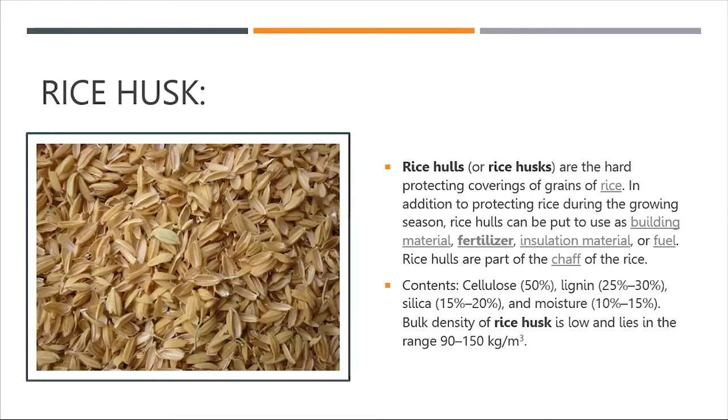Not so easy. Actually, silica from rice husk here in Malaysia is used in a low temperature combustion process to create an amorphous silica that can be used to make aerogels. Because if the silica is burned at high temperatures and becomes crystalline, you can't dissolve it. But we have developed, together with the local university, a low temperature burning process where they collect all that material and make it into an aerogel, and the product is already being sold in the market. This is what you can do with the silica. Of course, low temperature burning also means less efficient energy recovery, but you have a valuable byproduct.

Actually, I was very much against using rice husk for electric power production, because it's too complicated a feedstock, and the OPEX, the operation expenses, are much too high, because you have to regularly hack off the deposits from the pipes in the boiler. It's terrible - it's terrible stuff for a boiler.

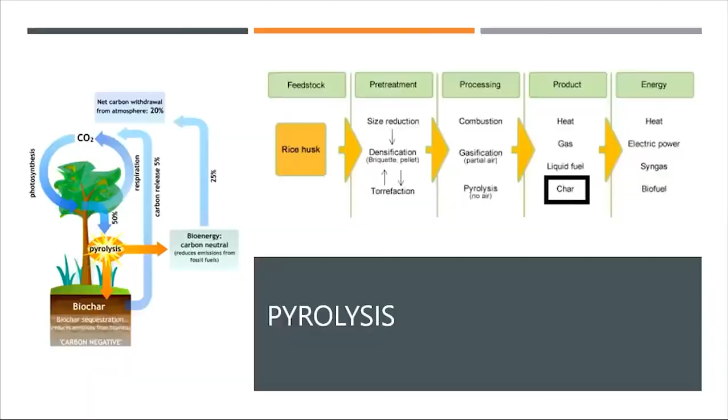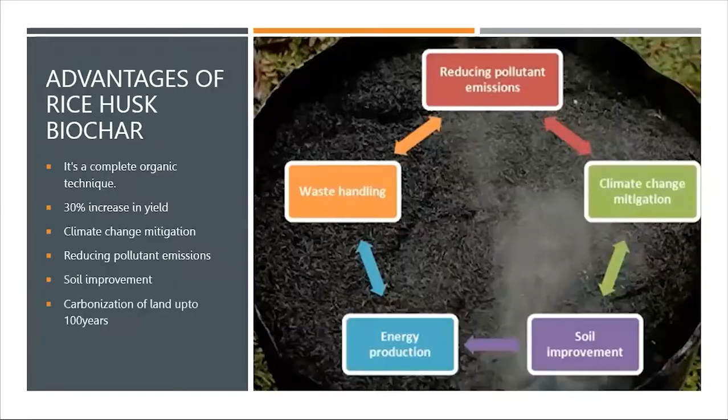Yeah, we may need to look into how we do it at lower temperatures, because when it's not crystalline, you don't have to hack it off. That's true - other type of burning mechanism. Interesting, I have put my LinkedIn address up, so if you would like to connect, I'm interested in hearing more about that, because we are working a lot with rice in India.

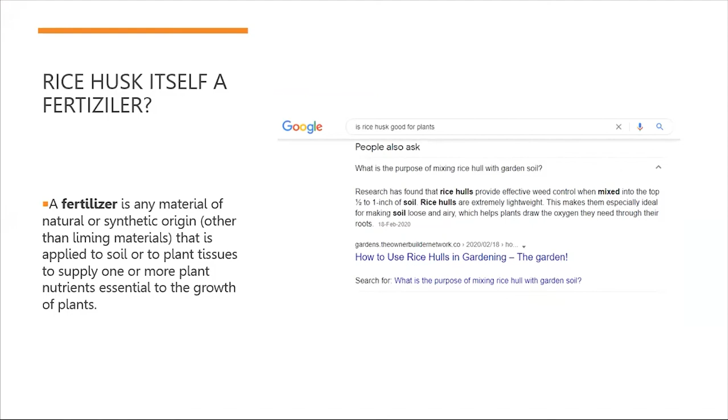Let me share some realities of rice husk in Pakistan. Basically, rice husk is not a product of the farmer; it's a product of the rice mills. They process the rice and use the husk for their own boiler for energy generation.

The people who buy the rice husk for their low pressure boilers face slagging behavior on the walls of the boiler because of the silica content. We observed after passing through the boiler it's 52% in the bottom ash, with very little fly ash, and even fewer nutrients in the final ash product.

If we compare with wheat straw and corn stalk burning, the potash level is around 15% in the fly ash, but it's less than 3% while using rice husk. On the other hand, bottom ash production goes 30% higher than normal biofuels.

The other thing is the rice husk is available in loose form in Pakistan. It cannot be baled because of the very fine particles, and in raw form its silica content is close to natural sand—the bounded silica is around 10 to 12% inherently. We normally recommend the inherent or bounded silica should be below 5% for smooth boiler operations. So that's another side of this rice husk, particularly in Pakistan.

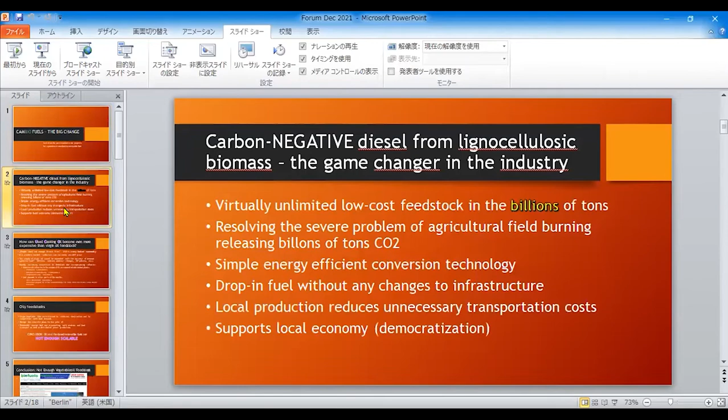Will you please click on the third slide? Just click it on the third slide. On which one? The third slide, or use your up and down arrow keys. Yes, yeah, now it's working. It's working now. Okay, then we run it from here. I don't want to go through the whole thing again. If the full screen doesn't work, then let's go through the small screen. But here you can see, I hope. Yeah, we can see now.

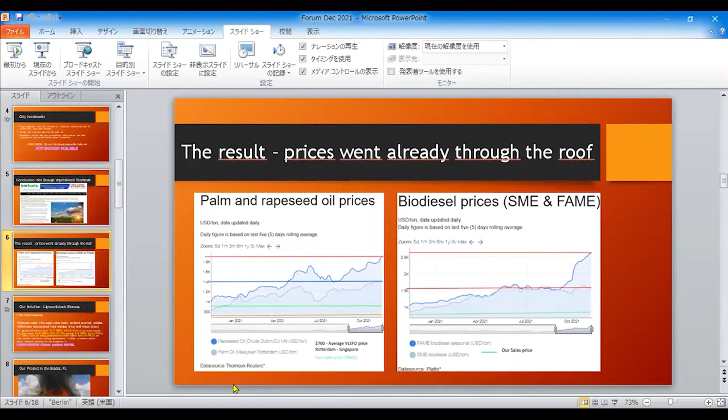You see what's happened with the vegetable oil prices, they are really going up through the roof, and that's through this competition from repurposed refineries, fossil fuel refineries. It will further increase and push prices even higher. It's unbelievable what's happening there.

Okay, so our solution is pretty simple. We take lignocellulosic biomass, which is completely without limits. We use biomass waste like sugarcane trash, orchard pruning residue, for example in California from almond shells and walnut shells and things like that, and also the pruning residue, which is very, very good feedstock. When they have harvested, they cut the trees, the branches of the trees.

So our main target is the otherwise incinerated field residue, rice and wheat straw. And that's quite amazing what's happening with the incineration: 16.6 billion tons of CO2, 9.8 billion tons of CO2 equivalents, 1.1 billion tons of smog precursors, and 66 million tons of PM2.5 go into the air through this. It's estimated that about 1 million people in the world die prematurely due to this kind of emissions.

For us, it means an unlimited potential for the production of carbon negative biofuel. Why carbon negative? We have a side product that is biochar, and much of the biomass, or the CO2, is sequestered in the biochar. So in the end, our fuel emits less CO2 into the air than if you were burning it in the fields.

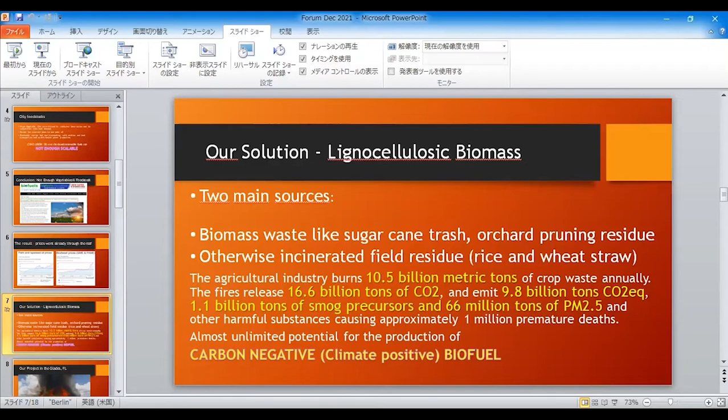So this is what we are doing. This is a project in the US, in the Glades in Florida. Before harvest, they incinerate the sugarcane trash. There are, in the meantime, other harvesting methods there. And it's good for 800,000 tons of fuel oil that we could produce there.

This is our project in India. Farm to Energy is a company harvesting the rice paddy, rolling it up and baling it. They deliver it at the moment to thermal power plants for incineration. But the yearly potential is just scratched on the surface - it's 20 to 25 million tons, which is good for 5 to 6.5 million tons of fuel oil.

To give you a comparison, Maersk, the largest shipping company in the world, uses about 10 million tons with their 750 ships. So we can make quite a big dent already with the feedstock available in Punjab. In total we have 17 projects in the pipeline in the US, in the Philippines, in Vietnam, in India, Sri Lanka, Mauritius, and Morocco.

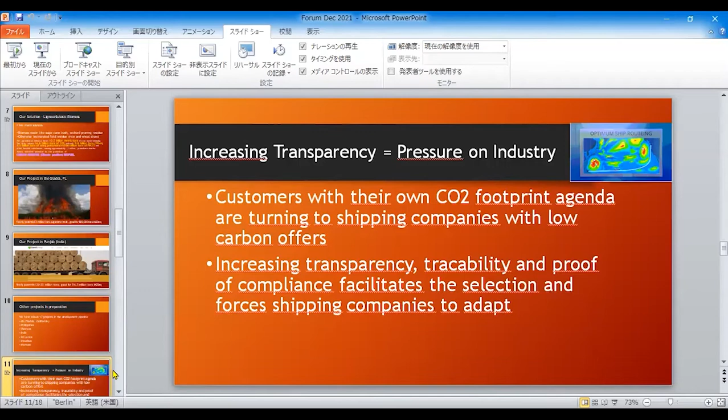Okay, next. How do we do it? We are using a zeolite, a catalyst. It's also called a molecular sieve. It has, in principle, small openings that crack the material. I cannot go into much detail, but that's what we are doing, and it's working, which is nice.

So what we are doing is taking the long hydrocarbon chains of the lignocellulosic material and cracking them into shorter chains, and they fall into the range of diesel.

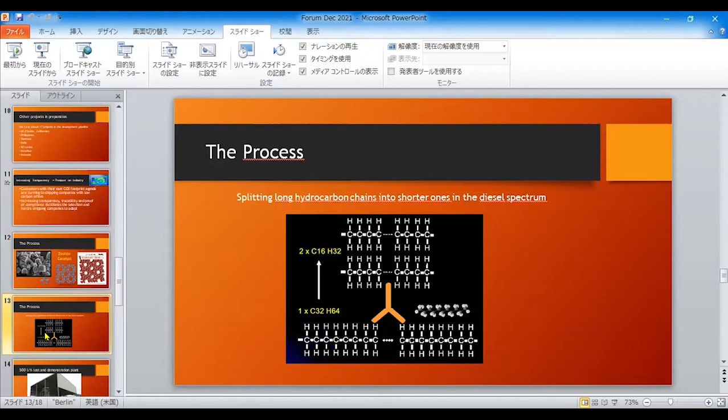This is a 500-liter test and demonstration plant per hour, so that is about 4,000 tons per annum production. This would be a standard for a village or a small town to produce their own fuel for their trucks and agricultural machinery. They don't need Shell and Exxon anymore.

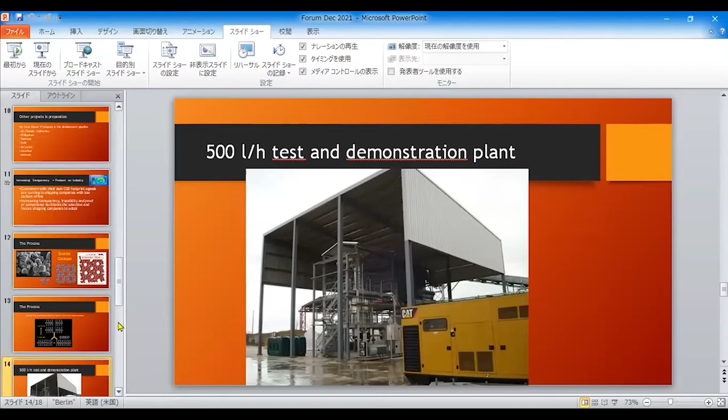Okay, I don't want to go into many details. The interesting part is when it's used in the ship, there is Daphne Technology, a new company in Switzerland. They have a new exhaust gas cleaning system which will make our fuel better than zero. We can go carbon negative. And we don't have harmful substances because this filter is filtering out 95% of sulfur oxide and nitrogen oxide, and they make fertilizer out of it. Very fascinating technology, I really love it.

So this is something you should keep in mind, because this can also be used for diesel power plants, even for conventional diesel power plants, not only with our fuel, but conventional diesel power plants can use this as well.

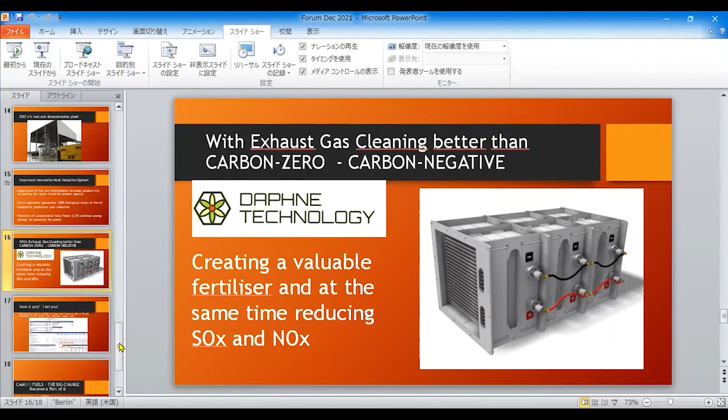It's a good company. This will convert these things to electricity? This machine will convert to, produce electricity? Yeah, you know, you have diesel ship power plants, as you mentioned. You have diesel power plants all over the world, yeah? And this filter is actually filtering out all the harmful substances from the exhaust of diesel power plants.

Okay, so the Philippines have, for example, 1.6 gigawatt of diesel power plants, a huge number of diesel power plants. So the question is, what is the feedstock price in your country right now per ton, on average, of all feedstock you are using?

Yeah, we just have to collect it because it's a problem for the farmers. The Indian government even had high fines for incinerating it, but they don't have the money to collect it, so we do them a big favor in just collecting it. And of course, in the long run, we will have to pay for it, but it will probably be in the range of initially $10 to $15 per ton or so, but it's more than nothing. And at the moment, for them, it's a headache.

Do you work with wet sludge as a feedstock? Wet sludge, no. We need to dry the feedstock, and also we have to get it down to about 5 millimeter size. We are using a special machine from the US that is producing down to 200 micron powder from it, and it's very energy efficient. It's not a shredder, it's a kinetic disintegrator, which is drying and disintegrating in one stage, and it's a very smart system.

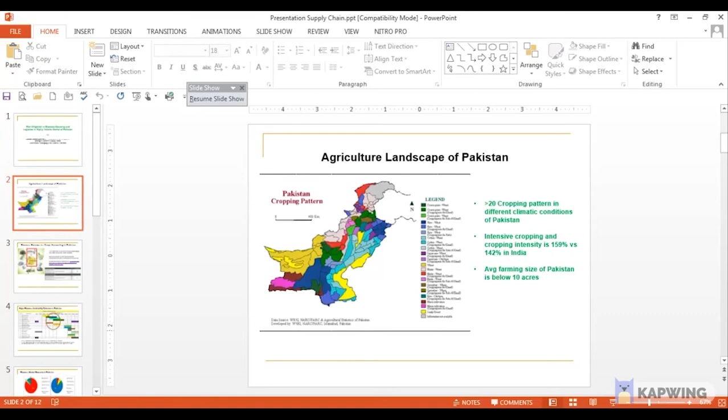So let me explain the agriculture landscape of Pakistan. Pakistan's total area is around 79 million hectares, and out of that, 36 million hectares is cultivated area. There's also cultivable waste and other urban area, and 5.9% is forest area in Pakistan.

Talking about the cropping pattern across the 5 different provinces of Pakistan, we have 22 different cropping patterns existing under different climatic conditions. For example, people cultivate wheat, rice, or cotton, and similarly those who cultivate sugar cane intercrop with some fodder as well. Similarly, corn and potato form another cropping pattern. These different cropping patterns show that we have over 20 different biofuels available in Pakistan.

But there's another side to this: intensive cropping. Cropping intensity is 159% in Pakistan versus 142% in India. This shows we are quite intensive in terms of farming, and the only reason is the low income of farmers - to get revenue from the field they cultivate 3 or 4 crops a year for better profitability. But this intensive cropping is very harmful for soil organic matter balance, because we are depleting the soil nutrient profile as well.

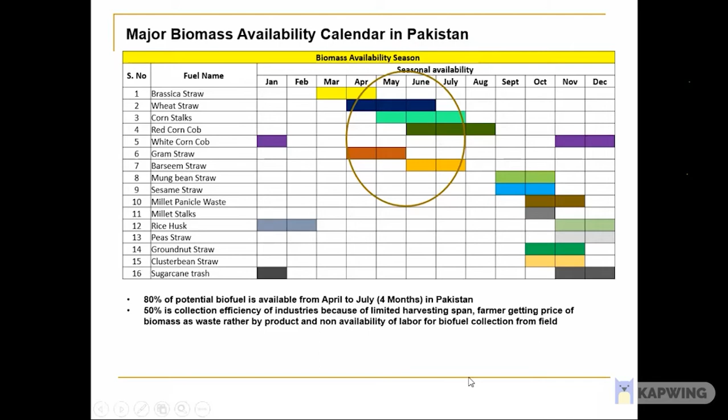If we talk about the scenarios of the biomass market in Pakistan, there are two different realities: what happens with manually harvested crop versus mechanically harvested crop. 85% of manually harvested biomass, especially wheat straw and rice straw, goes for animal fodder. The rest is 3% for domestic burning, 5% for brick kilns, only 5% used by industry, and 2% burned in the field.

While for mechanically harvested biomass, 80% is left in the field for burning—that's the major reason for the smoke right now in Pakistan. Then 8% goes to domestic burning, and only 5% collection efficiency for animal fodder. So both situations are the reverse of each other. There's also 3-4% used by brick kilns for mechanically harvested material, but the issue is we don't have the right equipment for collecting this mechanically harvested waste stock.

Yes, we have field balers and locally made shredders available, but the practices are not aligned. If we talk about using eco or Claas balers in the field, corn is sown on ridges rather than on a flatbed. Similarly, there's no line spacing or row-to-row distance maintained in wheat and rice—we are mostly using broadcasting.

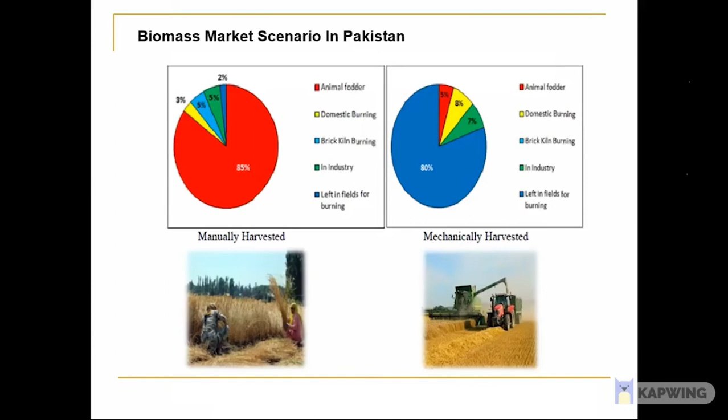Some farmers are using high bed raising, some are using zero tillage, so the practices are not aligned. So you cannot depend on the field baler, because if you use a field baler, there is high wear and tear and high damage to this machine.

So the collection efficiency is low in this situation in Pakistan. So what to do while sourcing this biomass? The best model is to transform this agriculture into energy: industries have to take 50% of their collection in hand, establish their own collection sites and processing sites where they store it, then move to the industry and schedule the arrivals accordingly.

30% should be small contractors that are outsourced, with a long-term contract backed by a potential fund, because there is a cash flow issue with the contractor. So the industry needs to establish a link with the contractor and bind them for the long term, because it's a very volatile market, and if a supplier gets a very attractive price from another industry, he will not stay bound, and he will supply the material in season to another industry.

So this is another big gap in our market, where no formal contract has been placed between the industries and the contractors. There are only verbal commitments agreed between the industries. This should be established, and I understand this from my 11 years of experience dealing with this biomass supply chain.

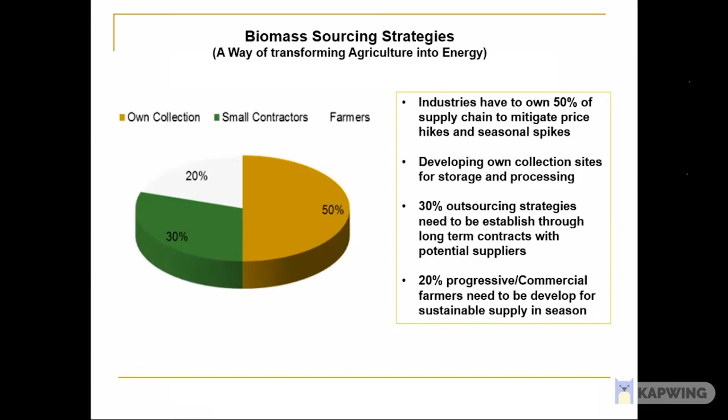And those should be located around the industries to give maximum share to those farmers. So this is a proposed model to mitigate the risk at this high level.

But this proposed model is that 50% should be owned by the industry, where they do a joint venture for harvested residues, and involve their logistics contractor to collect residues from the field into an in-transit space or storage area where they process, stack, store, and bale and shred. Trailer mounted equipment is available for baling and shredding these biofuels, then it's stacked at their facility and scheduled to the industry.

And the other 50% should be contractorized: 30% should be contractors and middlemen on outsourced contracts to maintain the price, knowing what the industries are offering, working on roughly a 5% profit margin. And similarly the 20% from the farmer, so it's a cumulative 50% of the contractor and farmer share.

They can either go directly to the industry, or supply to a collection site located in the remote area, as Hans mentioned, that 40-50 kilometers is logical for any collection site for this model.

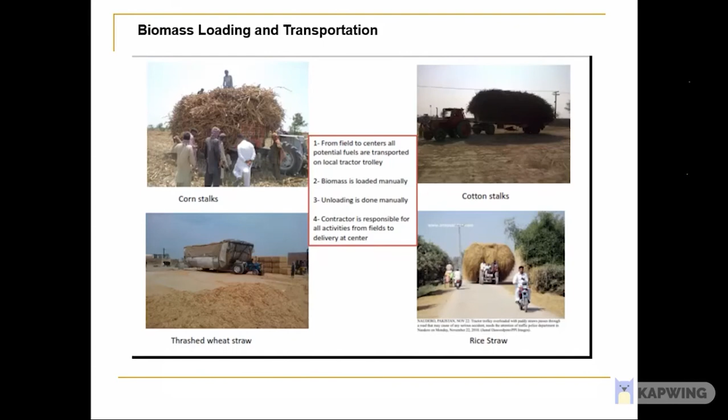So to convince the biomass transporters, there is a proposed mechanism. Instead of going for manual trolleys, as I showed in the previous slide, which is time consuming, there is another mechanism I've developed over time: we need to mount a 40-45 feet trailer with a prime mover, so we can load maximum material and follow road safety legislation, because manual trolleys are unsafe to handle and time consuming. There is a 30% time saving with this trailer-type loading.

Similarly, there is manual small bale handling and loading, 25 to 30 kg bales, which has a high labor cost and low bale density, that needs to be shifted to mechanized loading and handling with MHEs, material handling equipment. So these bales should be medium to high density.

As I told you, field baling is not much successful in our country, and we need to establish strategies to collect this biomass from the field, then process it at our collection site, where we need to put high mechanized balers or shredders, then bale it, and use material handling equipment to load the material. That gives time saving and cost saving.

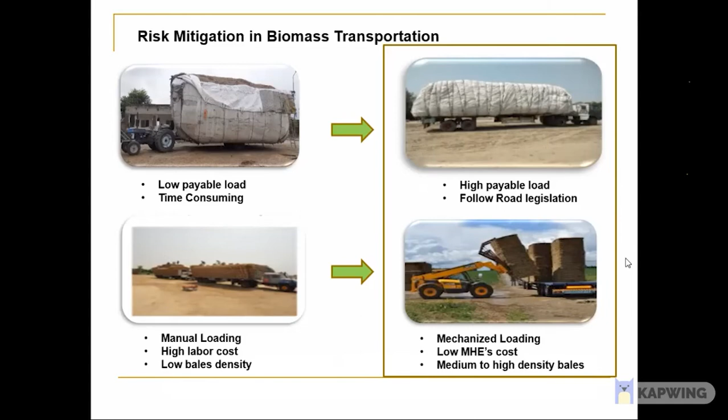So this needs to be followed. And finally, when you talk about this, the best option -- because we cannot get rid of loose handling of biomass -- the best strategy is sourcing 80% in the season for stock purposes.

and giving 20% of the market share for non-stock. The industry should buy 20% throughout the year. That will help to split the working capital, provide price stability, and make a rational fuel mix. And obviously there is freight optimization.

If you go for 70% baled material to supply to the mill, and 30% loose material, because the loose and bale ratio should be maintained -- we cannot get rid of loose material, it's a high share -- so there is a development that has to be followed for the best KPIs.

So the ultimate goal is cost-effective, less competitive, high calorific value biofuel supply for the industry to compete with coal and HFO, because I saw coal prices right now in Pakistan are above $180 per ton, and biofuel prices are $50 per ton. The heating value, no doubt, of coal is double that of biomass, but biomass prices logically show a very significant difference.

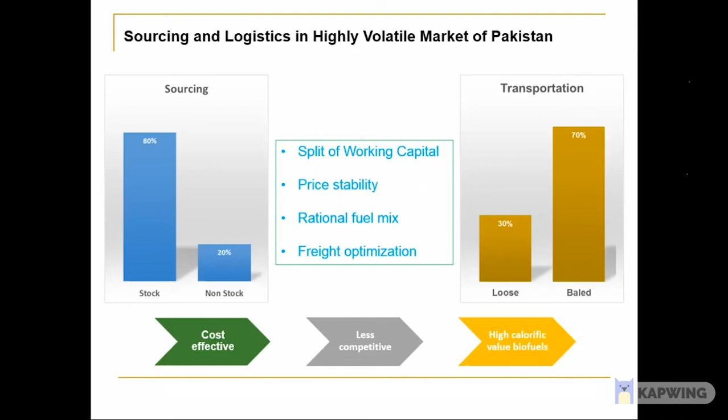So to maintain or cut down these prices, we have to go to this strategy. For an efficient biomass supply chain, we have to avoid competition on one fuel. As I told you, 17 different biofuels exist, so we have to avoid the competition. We need to give an equal or maximum share to those fuels which are abundantly available, and there should be low prices for high calorific value to get the maximum MMBTU per ton advantage.

The working capital can only be split with seasonal buying, and then we should avoid yearly holding costs, because fixed costs are also involved, along with investment costs while holding the material for the whole year. And to secure the volume, the only solution is fuel flexibility.

We should avoid the stock-out position, because normally in winter there is a stock-out position. So the focus should be to establish those fuels which are available in the winter season, that should be much, and there's a moisture constraint as well. So we need to make a mix, giving a share of 30% winter biofuel and 70% summer biofuel. So this could be the crux of an efficient biomass supply chain when dealing in Pakistan, in such a highly volatile and informal sector. We need to establish these strategies or practices. So this is all from my side.

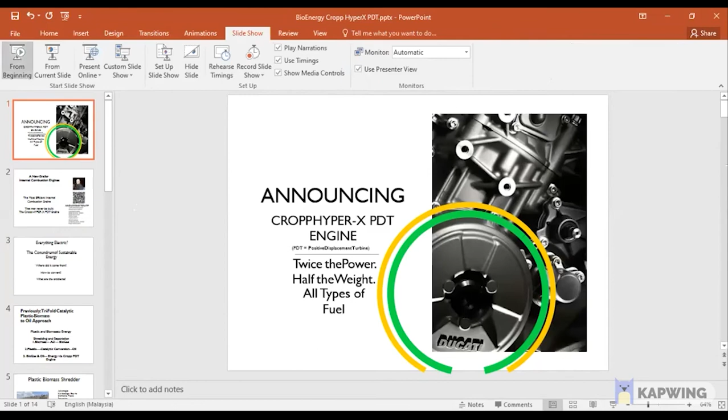Now the only way to do that, actually there are only two ways: one is by burning and making steam out of it, the other is by burning it in an engine. And as you all know, the reason we are all talking about electric engines is because electric engines are efficient by themselves, but the electric energy still needs to be provided. The reason we talk so much about electric is because the current version of an internal combustion engine is somewhere between 25% and, in the form of diesel, 40% maximum efficiency, which means we are wasting more than half.

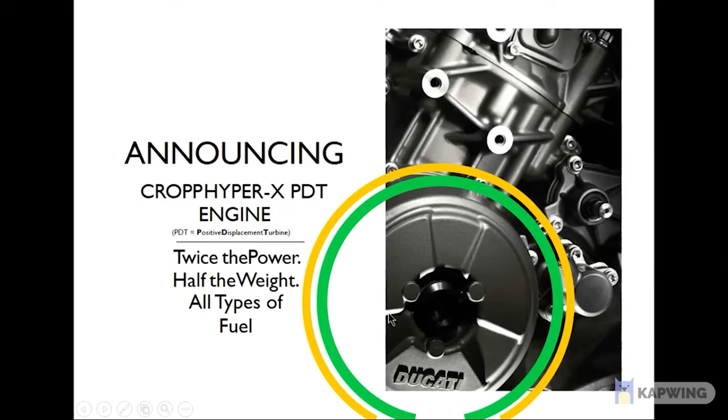So we hope with this presentation to start a new era for internal combustion engines, because when people stop talking about electric, they'll realize the actual energy comes from the sun and becomes biomass, which then has to be converted. And in order to start this new era, obviously we need to have some intrinsic benefits that were not available until now.

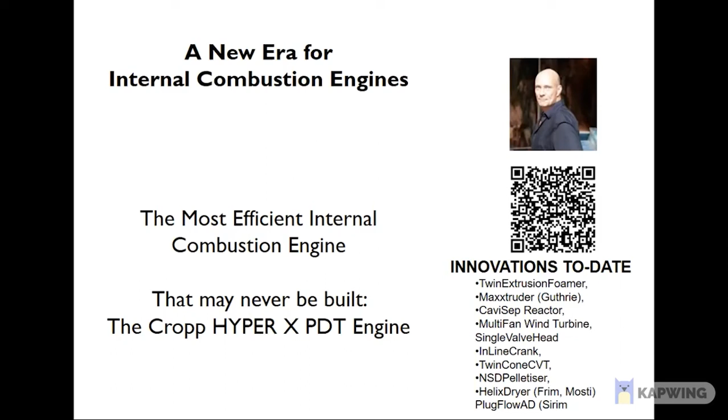We believe this to be the most efficient internal combustion engine ever built, but it may never be built if everybody keeps talking about electric and thinks electric energy comes from lightning or somewhere else from the sky. Everything electric? Yes, but only when it is converted from a source of raw material that contains chemical energy. Now, where did that chemical energy come from?

By growing plants. So even the fossil fuel that we are currently all using is nothing else than a plant source that has been converted and depolymerized to become oil. How can this chemical energy be converted? You have to burn it. There is no other way. It has to be oxidized.

When you oxidize it, you have the reaction energy to be converted either into steam, and from there via turbine into electric, or you directly use the gas pressure of that combustion to convert it into electric energy. The problems we all know: yes, we have some emissions, you can never get away from those emissions. But if the emissions create only 25 to 40% of the energy that is available, then we have a lot of unnecessary waste.

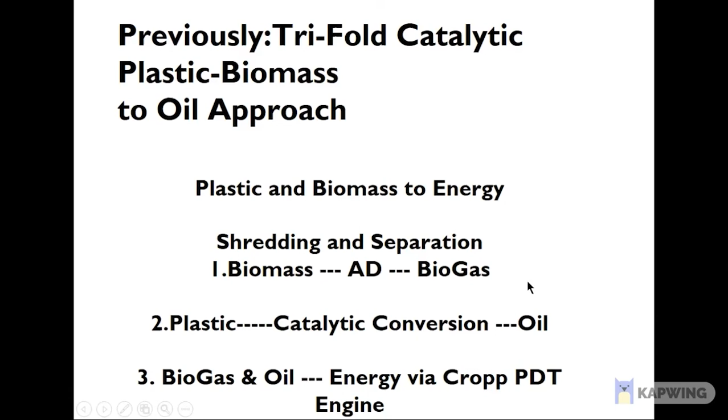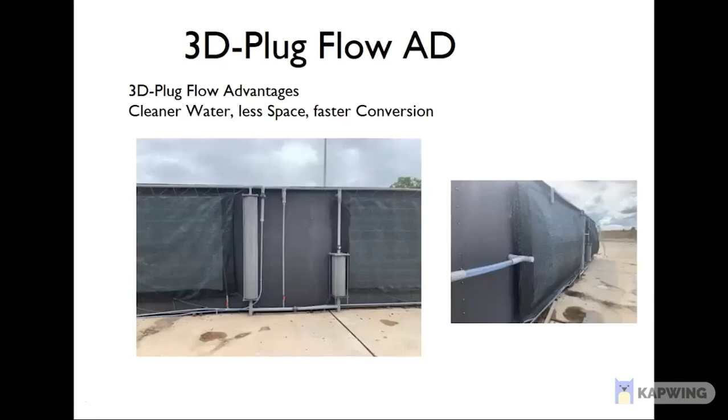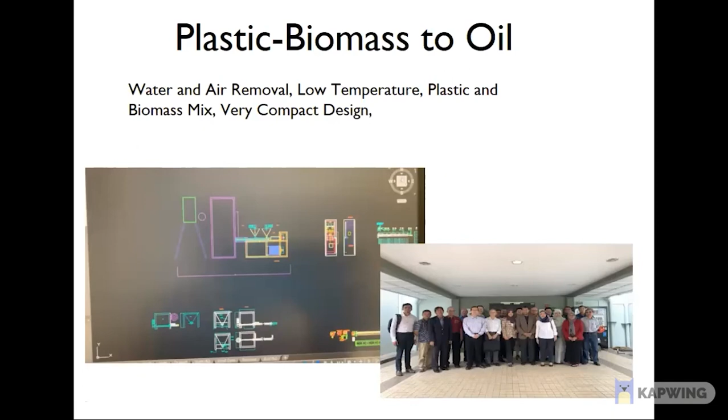Just for your info, this is the previous work which we have done on biomass shredding and anaerobic digester. These are the cleanup modules and the biogas storage. And this is our pilot plant design for converting plastic mixed with some biomass to oil.

Now, how does this engine convert more energy out of the existing chemical energy than all the previous engines that are currently known? We are talking Otto, Wankel, 2-stroke, 4-stroke. The reason is actually quite simple, and it is in the name.

We call this engine Hyper-X PDT, whereby hyper stands for extra large expansion, meaning when you have a normal engine, you compress 1 to 10, and when you explode, you decompress 1 to 10. We can compress 1 to 10, but we decompress 1 to 40.

This is how more energy can be extracted from the same amount of fuel. Now, what else does that mean? It means there is no more noise coming out of this engine because the pressure is converted into energy, which means there is hardly any pressure left. So we don't need silencers for this engine. We have less parts, less space, less weight.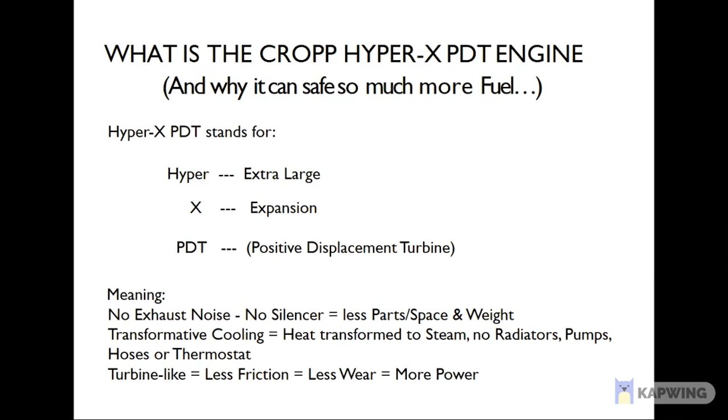At the same time, our engine is not a 4-stroke, not a 2-stroke, but a single stroke. Because of that, we have one explosion every turn of the shaft, which means for the same speed, we have double the power. But because of the design, the weight and the size is half.

Now the 20 to 30% more efficiency is coming from the fact that we harvest all the pressure as well as the heat generated.

In order to make this engine truly versatile, it is constructed as a modular unit. That means you don't buy a 3-cylinder, 4-cylinder, 5-cylinder, V8 or V6. The engine is composed of a single module which can be stacked, so the number of cylinders is just determined by the amount of torque required for the application. They simply can be stacked to create more power.

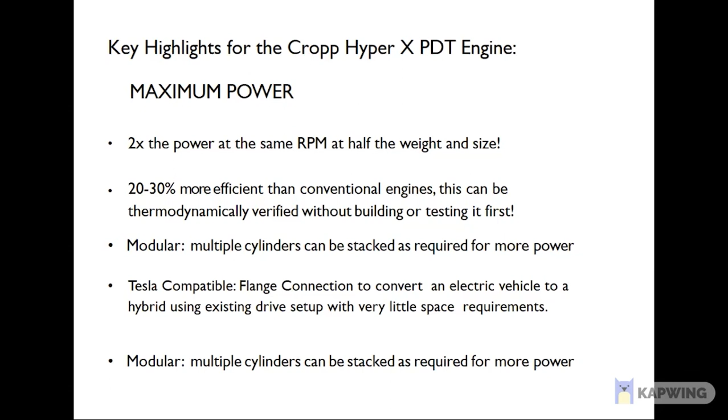Now, when it comes to industry, size and weight of any industrial output is always determining the baseline for production cost. In our case, we have half the size and half the weight, which increases the efficiency of the whole system of producing this engine, and reduces the cost for the consumer.

At the same time, any application where this engine is used will leave more space to be used. In the case of a car, for example, we have more space available for the passengers, or less space needed for parking.

Now, with the piston that has removed friction, we actually do not need to rework the engine or melt it down and recycle it that way. The lifetime is expected to be almost double compared to a normal engine. And the reworking is a simple process that will put the engine back into an almost new state and can be done indefinitely, which means this is the engine which you can buy for your car and then your grandson can inherit it.

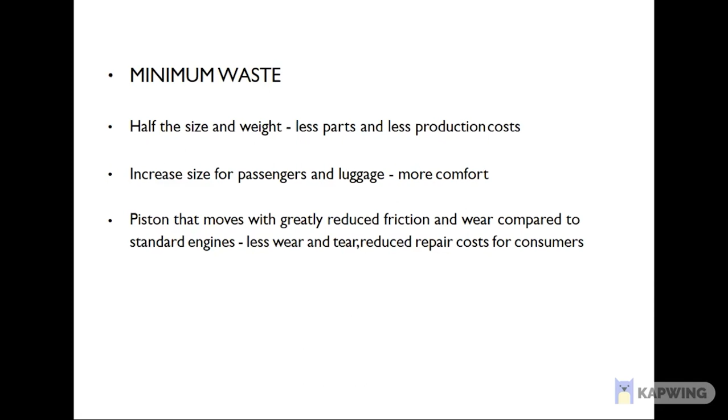This obviously saves a lot of energy in the industrial process of making this engine, and therefore all the CO2 emissions that come with it. In mass production, we expect this engine to be less costly, because if you have less parts and less raw material involved, you can lower your cost.

Apart from that, this engine doesn't require a lot of parts that are auxiliary parts for a normal engine. So radiators and the whole cooling system that is present in an ordinary engine, whether it's for a car, truck, or a generator, is not required. Instead, we have a minimal setup to inject water only in strategic important places. And from there, we harvest the energy that is created by the steam expansion.

Silencers and catalysts for the exhaust are also not required, because a longer burning time in each cycle allows full combustion without the need of having the exhaust gases treated by a catalyst.

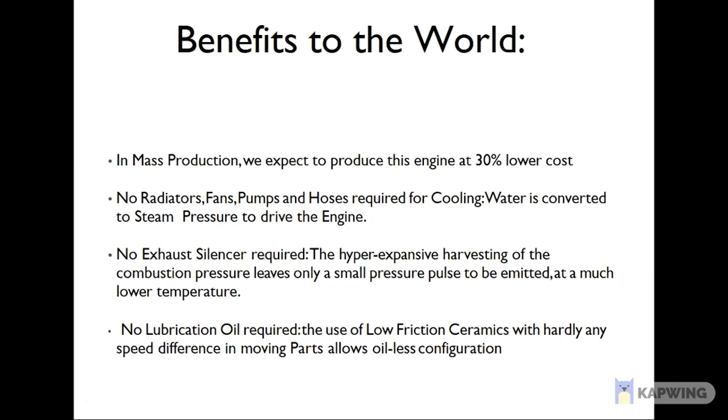Oh, there is one more thing which we have left out in this presentation, and it has to do with gearboxes. Okay, this engine can obviously be used to run on any biogas or even hydrogen, ammonia as fuel, but also any of the ordinary fuels, including heavy-duty fuel oil. So applications as generators and marine engines are easy to do with this engine.

Now, hybrid drives is an interesting proposition, because if you buy a Tesla, you have an electric motor there, but you don't have a hybrid, which means if no charging is available, that is a problem. This engine is actually designed to run without a gearbox.

The reason for that is we can have speeds that are way higher than a conventional engine, but we can limit the amount of fuel that is being consumed at those high speeds. Because of that, we don't need a gearbox. Now, you might be aware that the gearbox is a very costly part. So avoiding that makes all sorts of applications way cheaper than they are currently, because this particular part is not required.

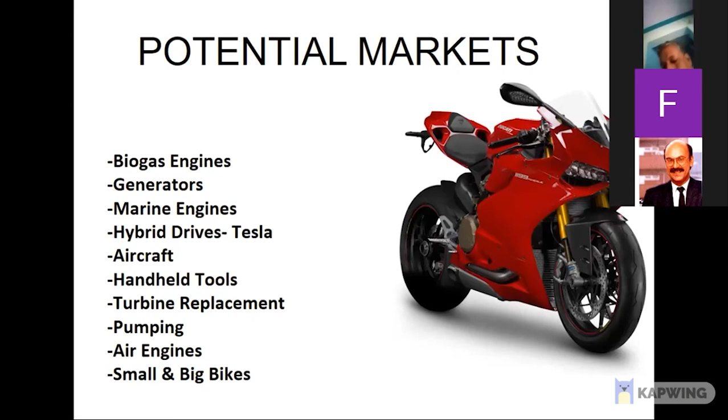So obviously, Ron Dennis will be right by saying that the future engines will be much greener.

However, while I have shared with you all the benefits of this engine, I haven't shared with you how we are doing it. And that has reasons which are suited in the legal realm because of patenting. We have all the designs ready to build this engine. But in order for the market to accept this, we still need to do a prototype performance verification with IP, and also we have to prove that the lifetime estimate that I have given can be verified.